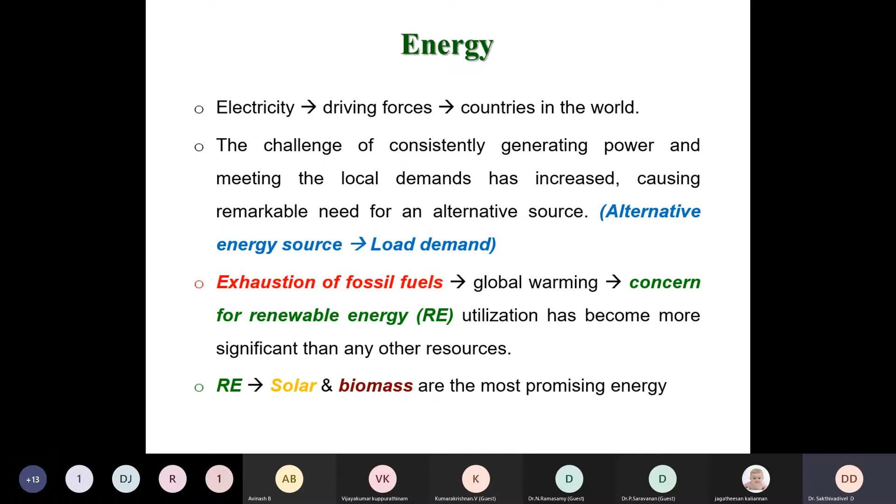So firstly, as I mentioned, sustainability is one thing we need to focus on in recent times and for future generations. The law of conservation of energy states that we cannot produce energy or destroy energy; we can only convert one form of energy into another. That is applicable for all renewable and non-renewable energy resources.

As I've already mentioned, we have taken biomass as one source of energy for converting it directly into a combustible form of producer gas, or syngas, through a technology called gasifiers. Before that, we want to discuss the other energy resources, and based on that, we have taken biomass as a source of energy for this gasification technology, so that energy conversion can be made in two different ways.

One is direct energy conversion systems, and the other is indirect energy conversion systems. In direct energy conversion systems, if there is no existence or involvement of any rotating component, we call it a direct energy conversion technology. When it comes to the indirect part, where a rotating component is involved, such as rotors and windmills,

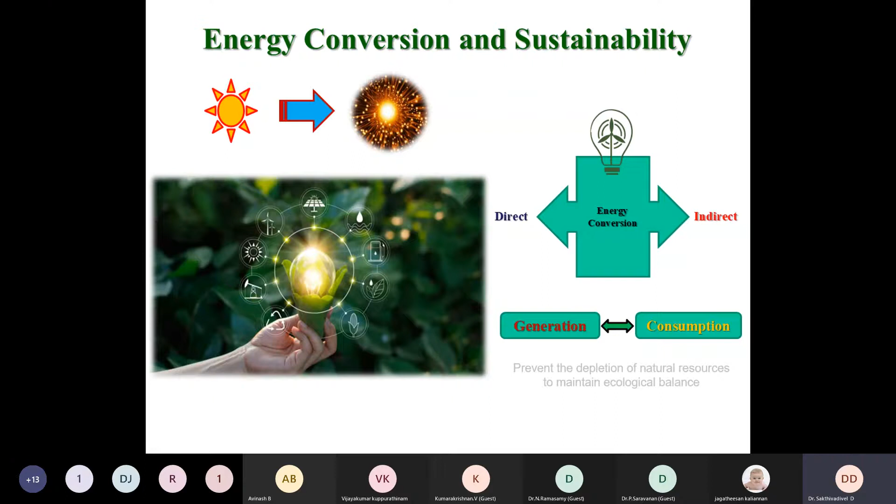Sustainability is also equally important whenever we are finding alternative sources of energy, and we need to take care of existing resources in terms of non-renewable energy resources. The renewable energy resources also need to be taken care of, where we need to transfer these energy resources to future generations. In that aspect, whenever generation equals consumption, we call it a sustainable solution, or sustainability, which is to prevent the depletion of natural resources and also to maintain ecological balance. That's why we are obviously focusing on sustainability.

When it comes to renewable energy resources, or the scenario of our country, as we promised in the Paris Accord on climate change in 2015, we guaranteed that around 40% of energy contributions will be made from renewable energy resources by 2030. One more important thing I will tell you at the end of the session. 2030 is going to be a remarkable year for our country, when all the promises are accomplished. By the end of November 2020, the overall contributions from non-conventional or renewable energy resources were around 38% for our country, and around 21% of total electricity consumption came from renewable energy resources.

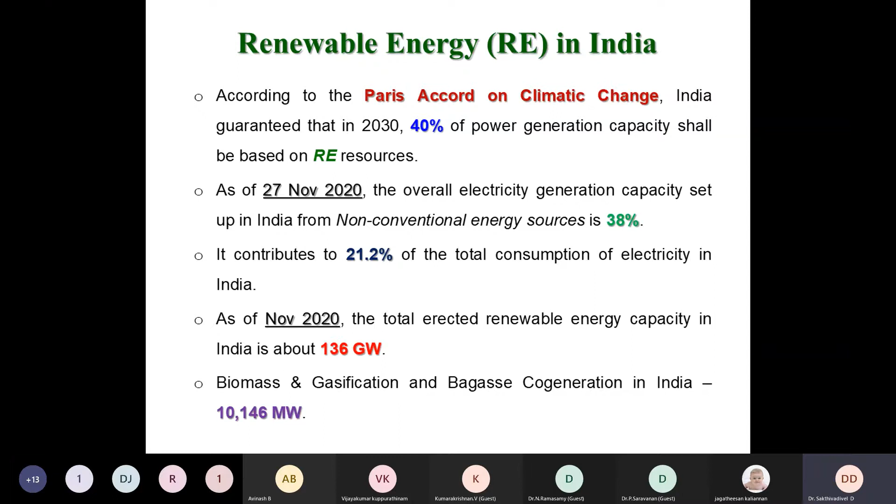The installed capacity of a country from renewable energy resources is around 136 gigawatts out of our overall installed capacity. Whereas biomass and gasification-based combustion systems are little low when compared to the solar and wind energy contributions to our country's overall installed capacity. So with this note, we will straight away go to the introduction part.

As we know, these biohydrocarbons, or simply biological matter or biomasses, are nothing but biodegradable materials over time or with respect to temperature. These materials can be derived from plants as well as from waste and from animals. So the chemical composition of this, we used to say, is a hydrocarbon also associated with some oxygen. Simply put, glucose C6H12O6 - here we have mentioned the chemical formula of a generic biomass fuel in this presentation.

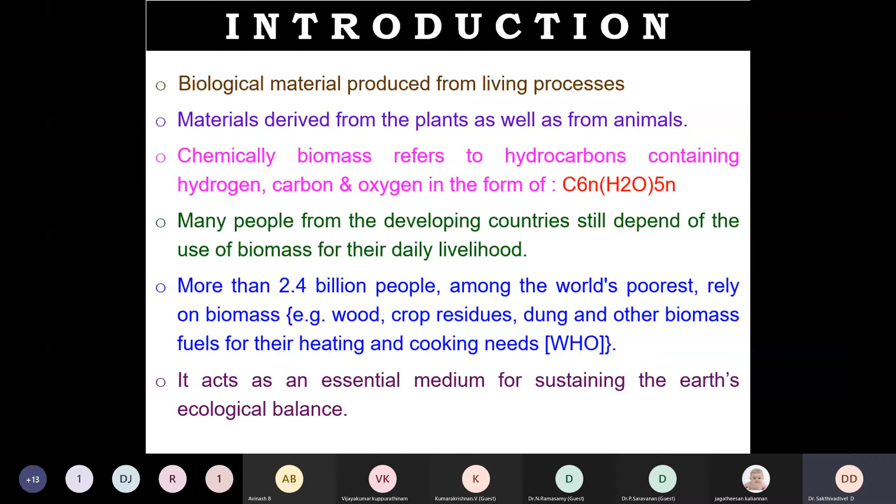Across the globe, many people, particularly from developing countries, rely on this biomass for heating and cooking - heating their households in cold climatic conditions, and particularly African countries relying on biomass for cooking applications too. So around 2.4 billion people across the globe are using this biomass for meeting their basic cooking demand. So these are some of the biomasses.

The classifications of the biomasses are given here: woody biomasses, crop residues, and animal waste.

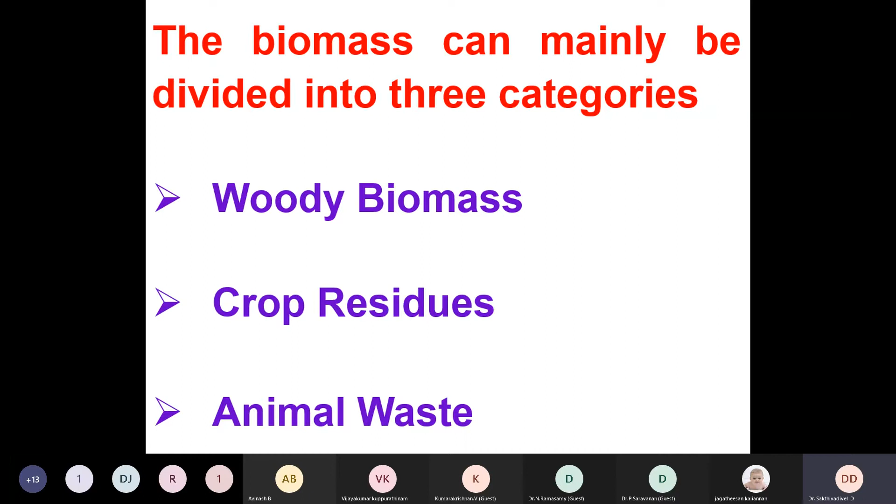Every day, on a day-to-day basis, we use these biomasses for many applications, which could be derived from the forest, or from furniture shops as waste, or from agricultural lands after post-harvesting or the cultivation process. We used to get a lot of waste that is being burnt in the field itself, which was creating a lot of pollution in the capital of our country.

That was being highlighted before this pandemic situation, a couple years back. So we need to address all these issues by identifying better solutions, by providing better technological solutions to convert this. Without burning it in the field, we can convert this into a useful form of energy - either electricity or thermal energy. For many applications we could consider using these technological solutions, by considering waste biomasses taken from the agricultural fields.

You can also find woody biomasses from forest trees, and this can be used particularly for cooking applications. In some rural areas, particularly in Tamil Nadu, we have Prosopis juliflora, which is nothing but Seemai Karuvelam maram in Tamil. That is an invasive tree that is to be eradicated from the motherland. So the government, and even our judges, have made some stringent comments on this to the collectors of a particular district.

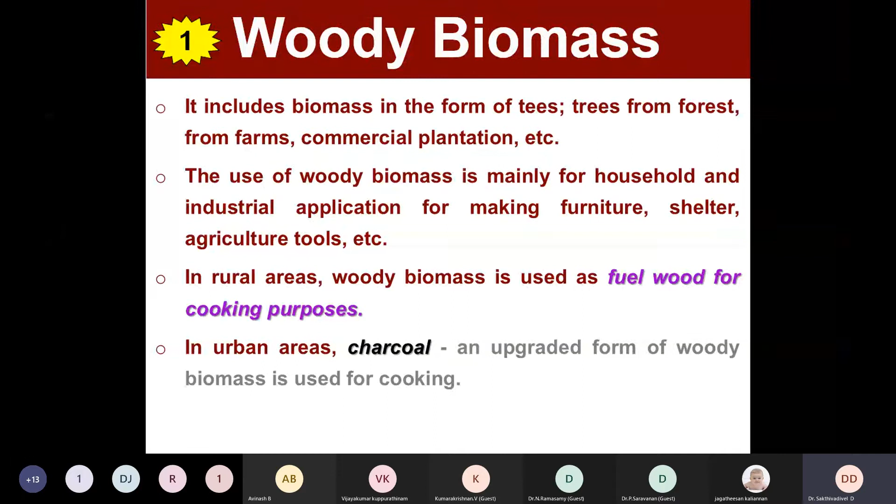This Prosopis juliflora was considered one of the main sources of income for people residing in that particular district, Ramnad district, and nearby. They used to convert this biomass directly into charcoal through charcoal-making kilns. Whereas if they sell these solid biomasses in the market at 0.5 or 1 rupee per kilogram, when they convert this into charcoal, they can sell it in the market at 12 rupees. So that is actually a good thing, as well as eradicating this invasive tree from the land. So that is one thing.

Animal wastes are also used - cow dung, poultry dung, and many animal wastes could be processed and used for cooking or for many applications. I would say one thing: this is the birth of the technology, meaning the gasifier, or converting solid biomass fuel into a combustible form of gas, is what is being done in our gasifier systems. It is the birth of the technology.

But this could even be used for the death of a human being, which I will explain at the end of the session. These cow dung cakes can be processed and used for cooking as well as for burning dead bodies. This can be avoided because the pollutant emissions will be directly injected into the atmosphere, which will directly contribute to global warming.

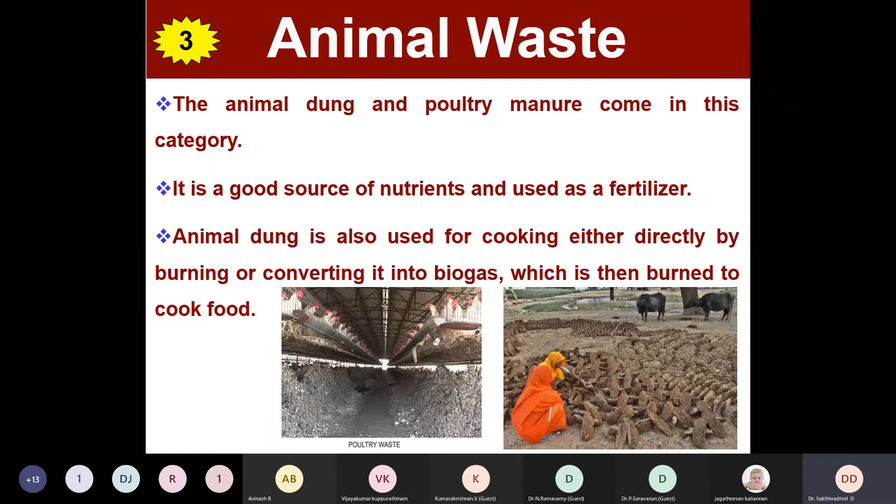This can be avoided by adopting a technology called gasifiers.

The energy content of biomass is depicted through the lower heating value and higher heating value. Energy content is a measure of how much energy, in joules, is released when you burn a kilogram of fuel.

In addition to carbon, hydrogen, and oxygen, moisture content and ash content are also associated with these fuels. These moisture and ash contents can create adverse effects if the biomass has higher amounts of them, so this should be closely considered.

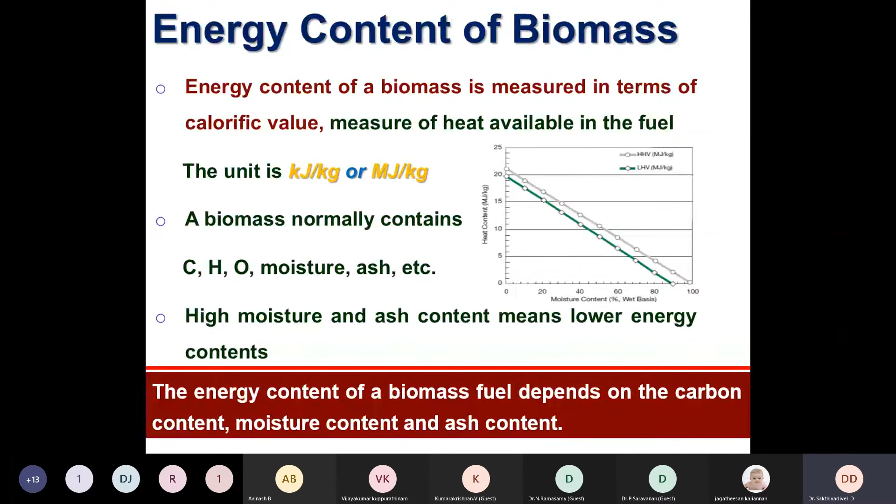We need to consider this moisture content whenever we are choosing the type of biomass gasifier to be used for any specific application.

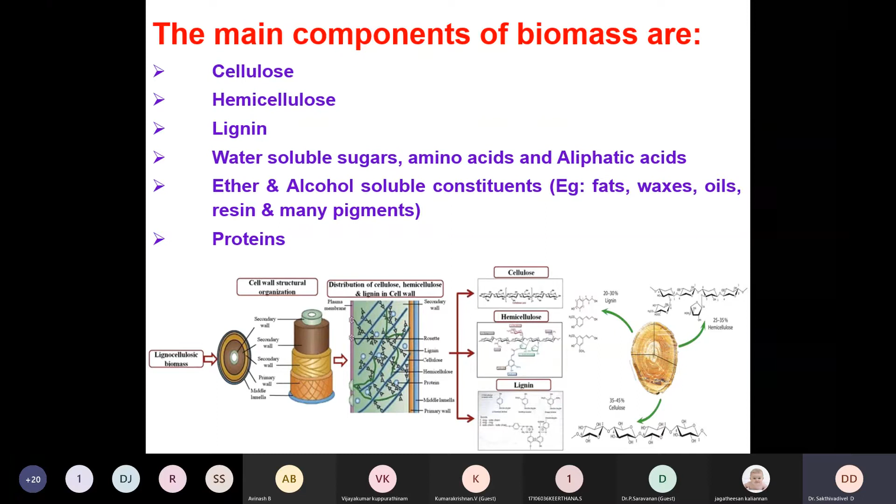These are some of the main components: cellulosic content, hemicellulosic content, and lignin content, which are the main sources of the calorific value of the fuel. Other water-soluble sugars, ethers, alcohol-soluble contents, and protein are also associated with it.

Almost every part of the country has an abundant amount of biomass, so the biomass potential is very, very high in our country.

Since biomass is a renewable form of fuel and accessible in nature, we can consider it for technological solutions to provide energy for meeting the basic demand of rural areas and also urban areas.

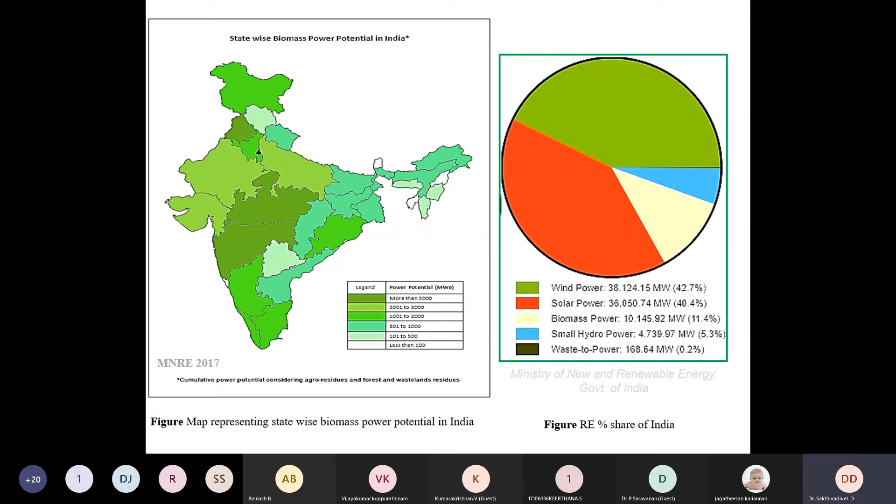This is the percentage share of renewable energy resources of our country, given in the right-hand side picture.

Now we'll move on to the carbon cycle. I wanted to make a point on the sun — it is a source for all renewable and non-renewable energy resources, and for living and non-living organisms present in this world, through the photosynthesis process, which drives the growth of trees.

In photosynthesis, carbon dioxide is taken from the atmosphere and H2O from the depth of the earth, and these are processed. The carbon and hydrocarbon produced will be stored in the stem of the trees — this is the growth of the plants.

This hydrocarbon stored in the stem of the tree will be utilized — not just the stem, but also the stalks and leaves, anything. Wherever we can find hydrocarbons, we can make use of it in gasifier technology.

This process is called gasification, where we produce producer gas composed of carbon monoxide, hydrogen, a very little amount of methane, carbon dioxide, and other things. In syngas, the purest form, almost only carbon monoxide and hydrogen with limited methane content will be present, and this can be used for many applications.

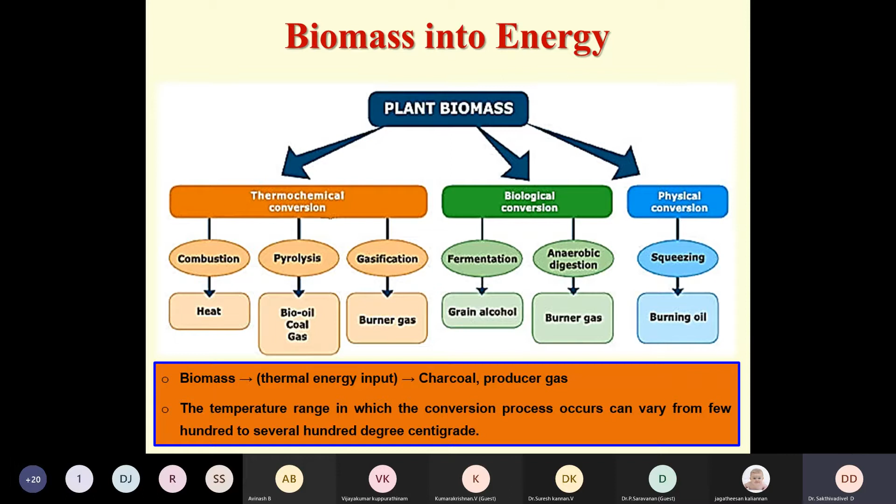In the gasification process, the solid hydrocarbon fuel is converted into a combustible form of producer gas with composition of carbon monoxide and hydrogen. This is the beauty of this gasification technology.

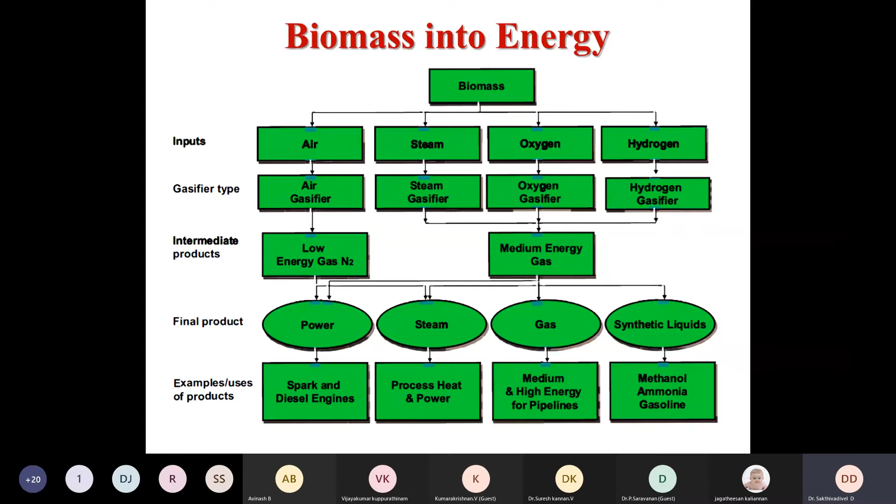Some of the gasifying agents used are air, steam, oxygen, and hydrogen, and we can use these for different applications. If you are particular about power, steam, gas, or synthetic liquids, you can concentrate on different types of gasifying agents so that the expected outcome can be achieved.

I will explain the next layer with the equivalence ratio in the next slide. Here the producer gas or syngas comes out, and once it continues to burn by interacting with sufficient atmospheric air, it is called combustion. There are a lot of differences between these three, but all of them take place together in any combustion reaction.

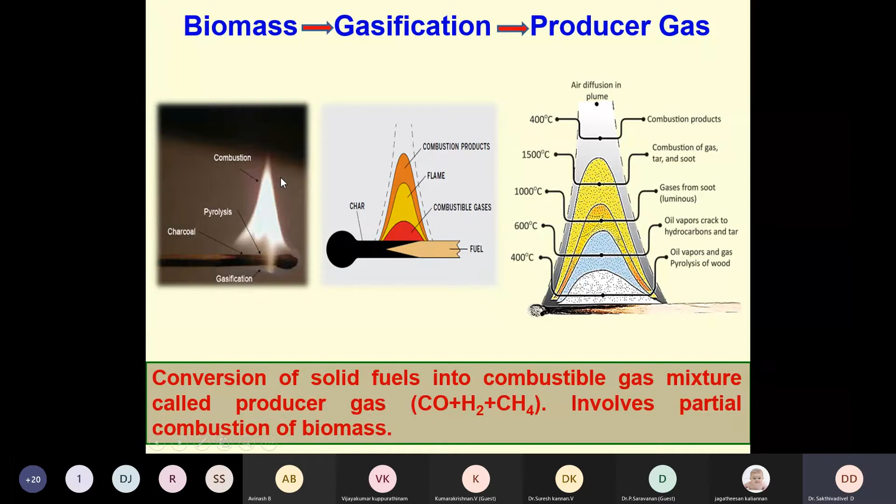The different layers and their temperatures are given in the right-hand side picture. This is very important for any type of combustion, gasification, pyrolysis, or carbonization process, because the combustion process is conducted at the equivalence ratio—the ratio of the actual air-fuel ratio to the stoichiometric air-fuel ratio.

When the equivalence ratio is around 1 or more, stoichiometric or excess amount of air will be supplied for the combustion process, so that complete combustion of this hydrocarbon takes place, and the remaining part becomes H2O or carbon dioxide.

But in the gasification or pyrolysis process, it is conducted at substoichiometric conditions, where the equivalence ratio would be nearly around 0.2 to 0.3. So the gasifying agent can be oxygen in its purest form, or we can use atmospheric air, and based on that we need separate calculations. Also, pyrolysis uses a very limited amount of air or no air supply at all.

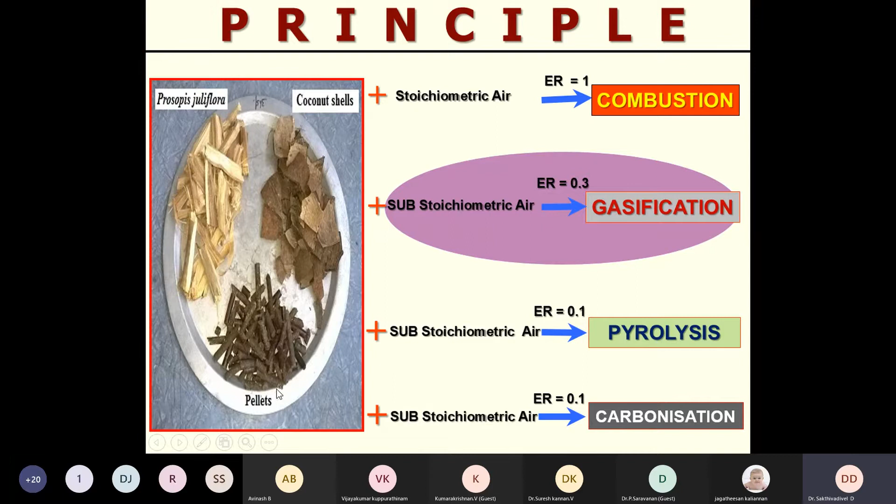Parallelly, pyrolysis and carbonization are almost the same, only the temperature difference makes sense in differentiating these two. As I already told you, excess air is supplied so that actual combustion can be attained.

Based on chemical calculations and reactions, we can predict the amount of air needed for combustion or any process — this is called ideal combustion, the stoichiometric air, where the exact amount is supplied. But you cannot achieve actual combustion this way, because excess air needs to be supplied for actual combustion.

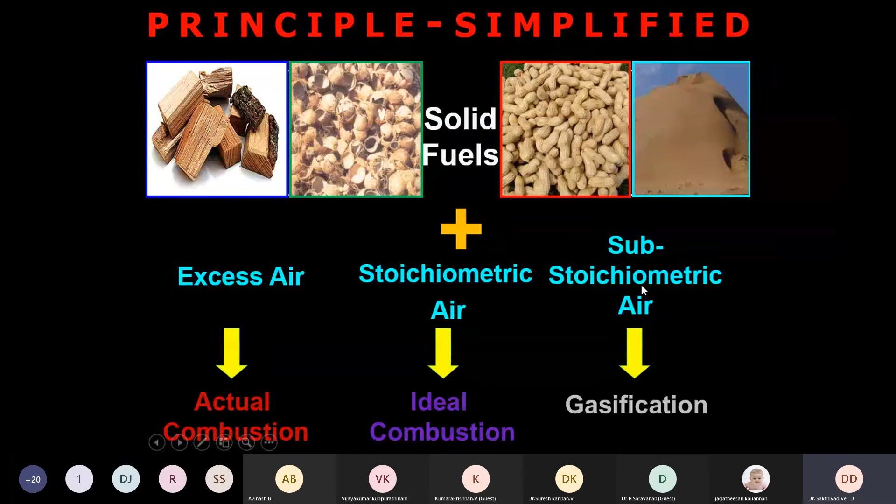Here, in the sub-stoichiometric case, we are limiting the air supply so that direct conversion of solid biomass to combustible producer gases can be achieved.

Look here, the C6H12O6 form of hydrocarbon reacts with oxygen and steam. If steam is used, you can expect much more hydrogen in the outcome. Steam gasification technology is also practiced for many applications.

Here, before the left-hand dotted line is the gasification zone. Once air is additionally supplied in the combustion zone, oxygen would also be found in the flue gases, along with H2O and carbon dioxide as the resultant products.

But in the gasification area, you get carbon monoxide and hydrogen, which are combustible. Still, you cannot combust carbon dioxide, as you know. So these combustible gases can be achieved based on the amount of air supplied.

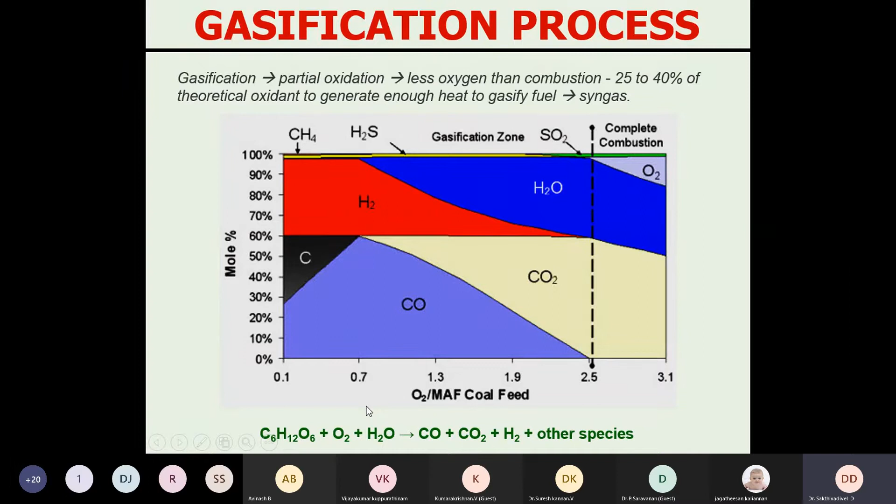So in the gasification process, these are the actual step-by-step procedures involved, from adding the solid fuel to generating electricity. This is not only for electricity generation, as I mentioned at the beginning of the presentation — it can be used for many applications, which I will explain at the end.

Once the producer gas is supplied to the engines, it can be coupled with a generator, so electricity is produced. That's what is shown at the bottom.

But the solid biomass, once taken into the gasifier, first undergoes drying, so the water content is removed. The second process is devolatilization, and combustion also takes place parallelly.

Here air will be supplied, and these are the carbon-based reactions expected in the gasifier. Carbon may react with oxygen to produce carbon monoxide. If it is complete combustion, then carbon dioxide will be the resultant product.

Once the red hot char is passed through, the carbon dioxide at high temperature reacts with carbon and produces carbon monoxide, which is further combustible in nature — this is the composition we expect in the gasification process.

The carbon also reacts once moisture contents are evolved, resulting in the production of carbon monoxide and hydrogen — this is exactly what we want. But all the other components will also be produced through this gasification reaction.

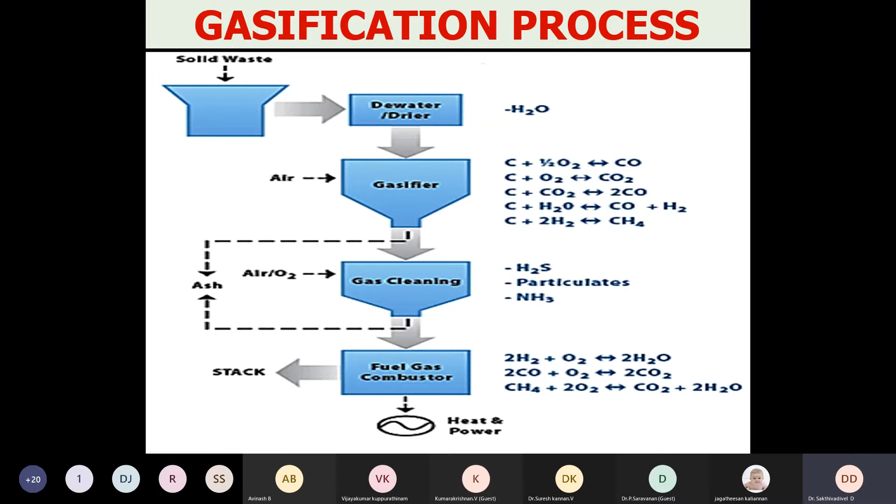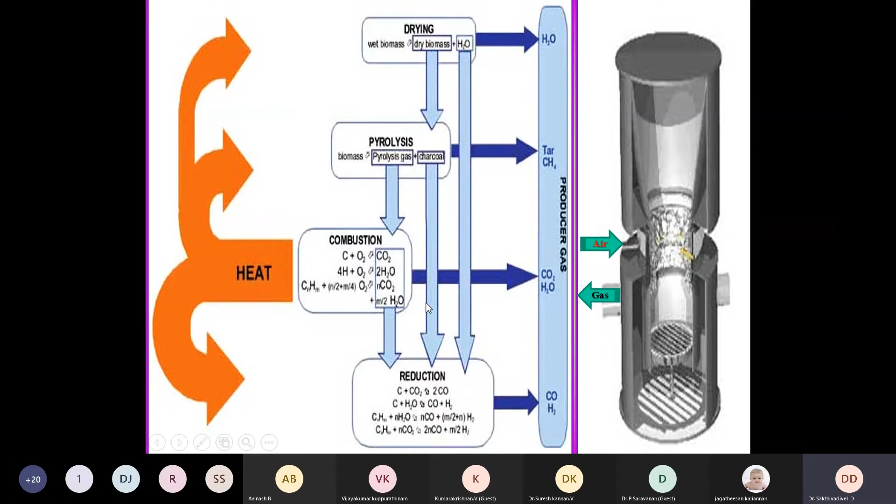Based on that, the selection of the gasifiers can be made. As I said, there are 4 reactions: drying, pyrolysis, combustion, and reduction, all occurring in parallel in gasification systems to produce the producer gas. The other reactions have already been discussed, so I'll be skipping this.

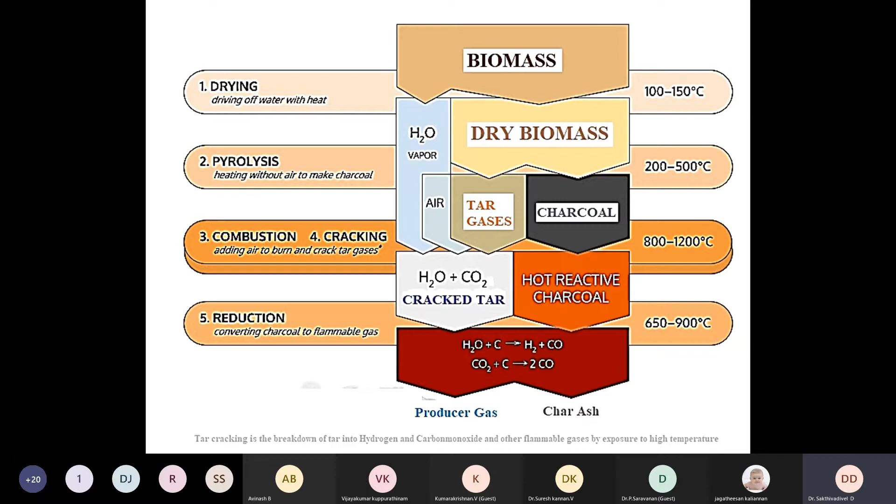The drying process is where the water content will be driven off, as we know. The pyrolysis is heating without supply of oxygen, or with very limited supply of oxygen, at lower temperature. The combustion or cracking of the tar content is performed in parallel, because at high temperature the tar content will be cracked, and aromatic and other forms of combustibles evolve from this cracking of the tar. Finally, the reduction, where carbon dioxide from the combustion process passes through the red hot char, so the carbon reacts with carbon dioxide to produce carbon monoxide. Again, this will be part of the producer gas.

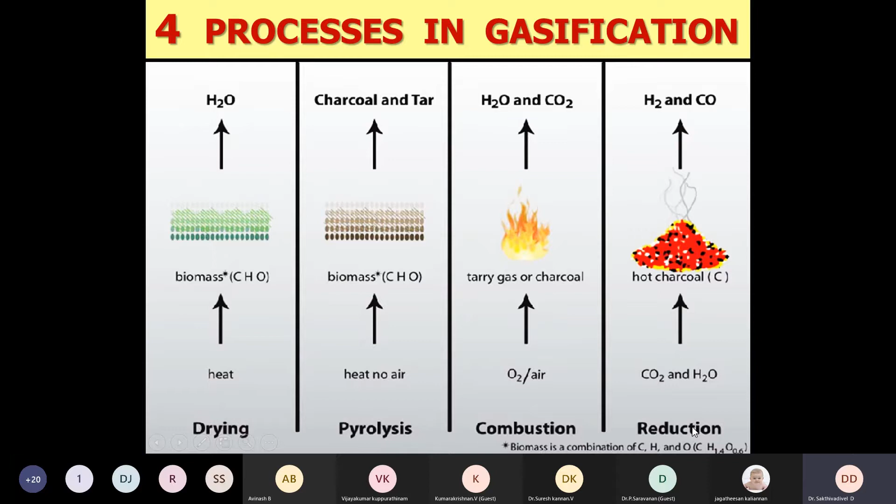Here I have given a table comparing the gasification and combustion processes. In the gasification process, carbon is expected to convert into carbon monoxide, whereas in the combustion process it converts into carbon dioxide. For hydrogen, it should remain hydrogen in gasification, but in combustion the resultant product is H2O. Nitrogen remains as is in gasification, but in combustion NOx is formed, since excess air is applied at high temperature. The sulfur content converts into hydrogen sulfide, and we have some techniques for eliminating this hydrogen sulfide, which I'll explain in the next slide. In gasification we expect syngas or producer gas, but in combustion the exhaust gas or flue gas is the resultant product.

So these are the combustion reactions: carbon produces carbon dioxide, hydrogen produces H2O. This is the actual reaction taking place in the combustion process.

But in gasification reactions, we have heterogeneous and homogeneous gas phase reactions. In the water gas reaction, H2O reacts with carbon to produce carbon monoxide and hydrogen. The carbon monoxide producing reactions are endothermic, whereas the carbon dioxide producing reaction is exothermic. These involve different phases: one is liquid, one is solid, producing gas. These include the Boudouard reaction and methanation reactions, which are heterogeneous reactions. But this converts into homogeneous gas phase reactions, where carbon monoxide reacts with H2O to produce carbon dioxide and hydrogen - all homogeneous reactions.

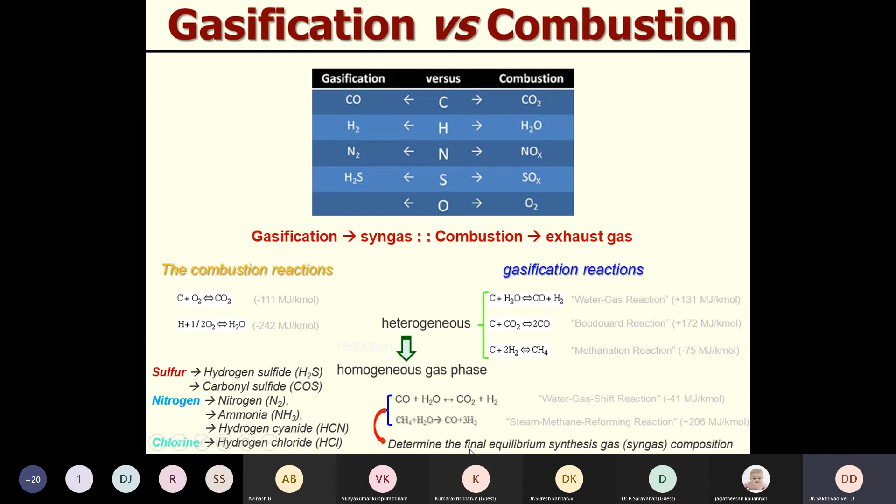Some gasifier technologies, different types of gasifiers, are shown in this picture: updraft gasifier, downdraft and crossdraft gasifiers, and one more called the fluidized bed gasification system, which will be explained in the next slide. The efficiency of the updraft is much higher than the downdraft and crossdraft, as far as other forms of gasification technologies are concerned.

But in updraft systems, one problem is that it produces a large amount of tar content, and the gas is expected at 400 degrees Celsius. When it comes to downdraft gasifiers, the temperature of the outside gas is very high and the tar content is very limited, minimal, so gas engine based power generation systems would preferably use downdraft gasifiers. Recently, hydrogen production has also been of keen interest to researchers using downdraft gasifiers, not updraft gasifiers.

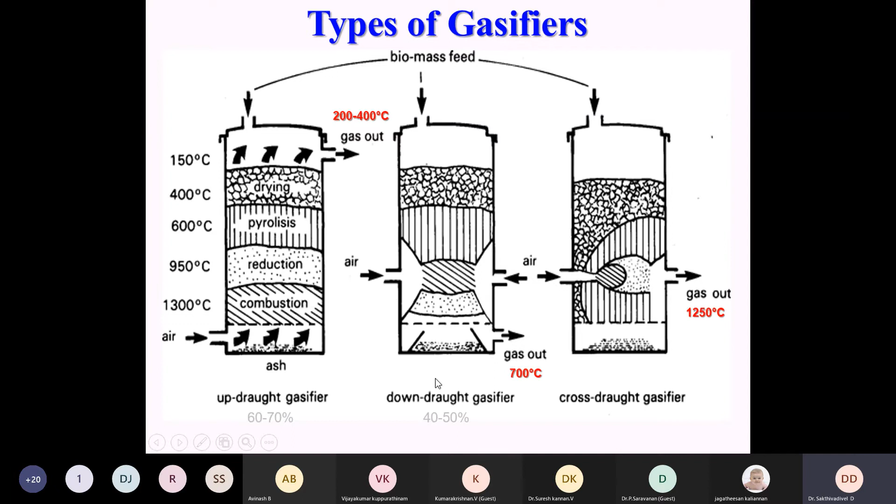This updraft gasifier can be widely used for cooking applications, where thermal applications are required directly. If heat is required, we can preferably take this updraft gasifier. But in crossdraft gasifiers, the initialization is very easy, and the size of the system is very small compared to the updraft, because the updraft is very, very high. So these are all the pros and cons of these gasifier systems.

In the co-current, counter current, or updraft gasifier systems, air is supplied from the bottom through a perforated plate called the grate, and on top we have the fuel feeders. Fuel is fed from the top and air is supplied from the bottom, so this is called counter current, and the gas is extracted from the top. As discussed, the thermal efficiency will be high and exhaust gas temperature will be very low compared to the downdraft and crossdraft gasifiers.

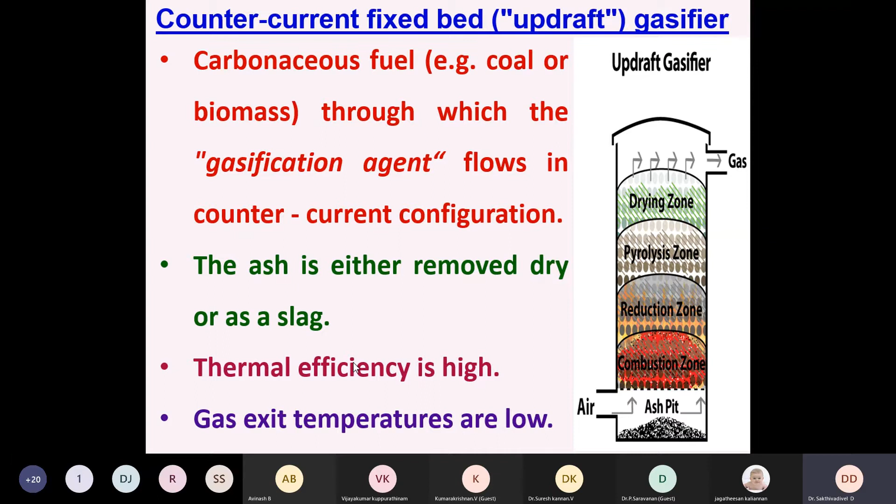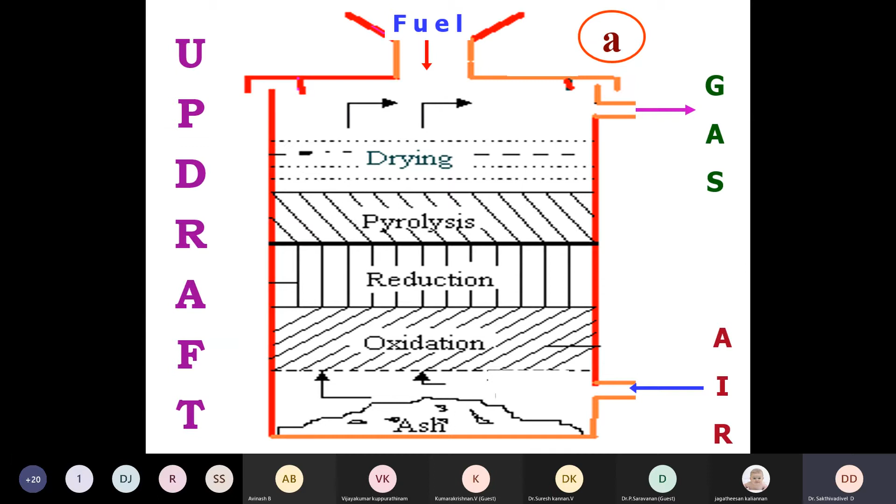These are the different stages: the drying zone, when the fuel is fed, the temperature drives off the water content in the biomass fuel or any fuel used in the gasifier. In pyrolysis, since there is no or minimum supply of air, we call it the pyrolysis reaction. When oxygen initially interacts with the biomass, it's called the oxidation process, where char is produced. The char reacts with carbon dioxide to produce carbon monoxide in the reduction part. Ash will be collected at the bottom, since this is a perforated plate, the ash content can be collected there.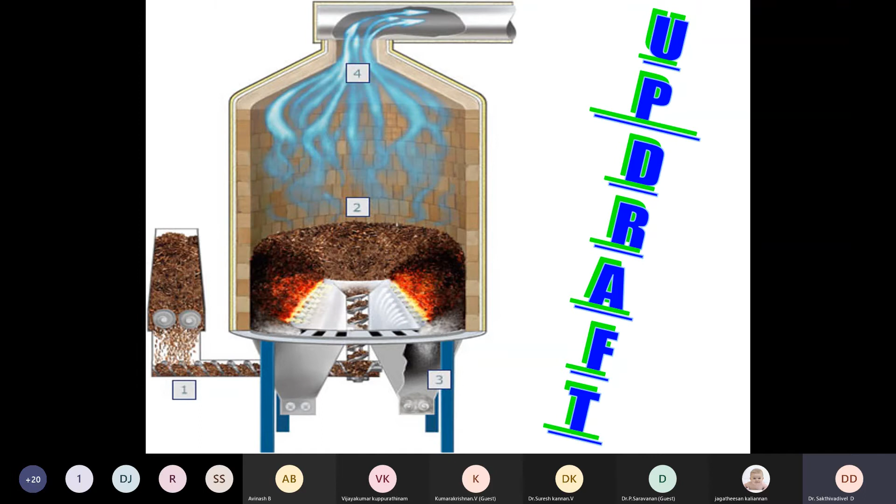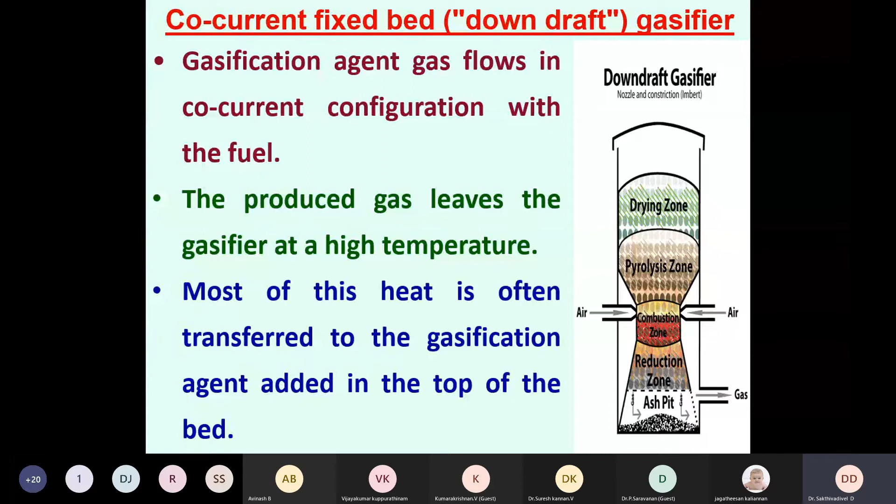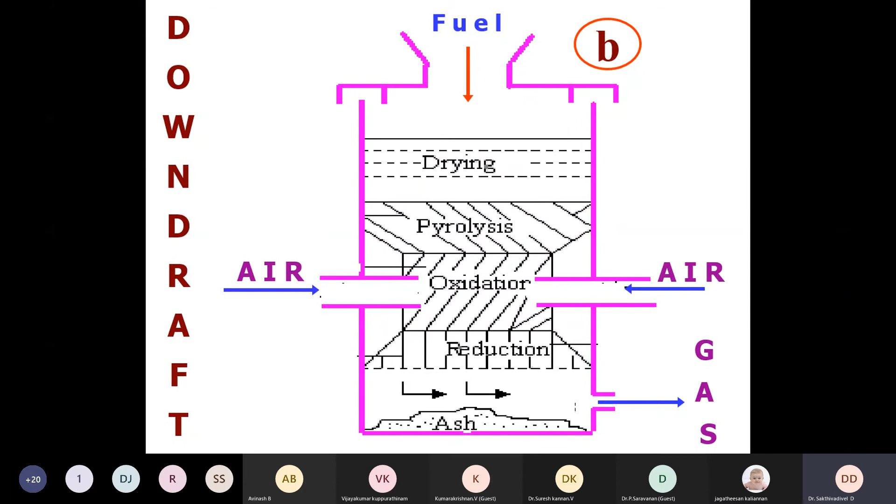Here in the co-current or downdraft gasifier, the pros and cons were already discussed. Here, air is injected at the top and the gas is collected at the bottom through the perforated plates. This sort of arrangement is called the downdraft gasifier. These different layers clearly show the differences between the updraft and downdraft gasifiers.

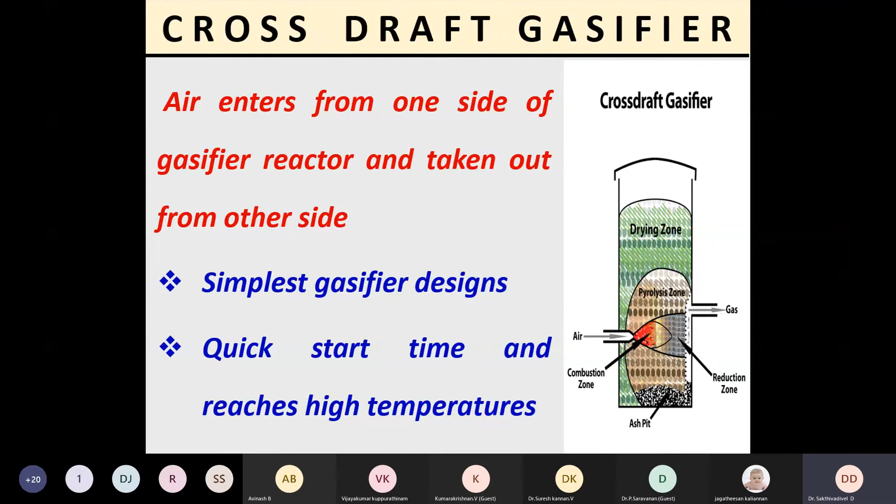Now we will go to the next process called crossdraft gasifiers. I told you that the simplest form of gasifier is the crossdraft gasifier, and whenever we expect a quick start of the biomass gasifier, we would preferably take this crossdraft gasifier. Whereas in fluidized bed gasifiers, a sand bed is maintained on the perforated plate called the grate.

Air will be supplied at higher velocities from the bottom, so pressurized air is used as a gasifying agent at very high superficial velocities, causing the sand bed to move, creating a kind of fluidization. This is due to the higher velocity, causing the sand to float in the air.

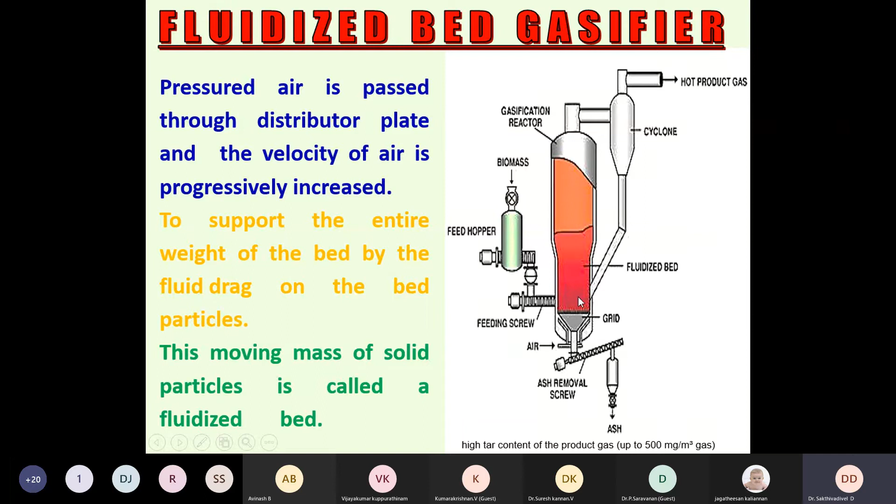The advantages of this system are that uneven sizes of fuel can be used, though higher tar content of the product gases is one drawback. It is a circulating fluidized bed gasification system, where sand particles and ash content are circulated back through the cyclone separators and fed again into the fluidized bed gasifier to maintain the thickness or bed size continuously.

So the temperature in the gasifier, an even temperature, will be maintained from the top to bottom of the fluidized bed gasifier. That is one of the advantages.

Also, smaller particles can be used in these gasifiers, whereas in the updraft and downdraft we could not use them because they would fall down through the perforated plate. But here the superficial velocity is employed so we can use them, and the operating temperature will be very low compared to the ash fusion temperature, so the clinkering effect can be drastically reduced.

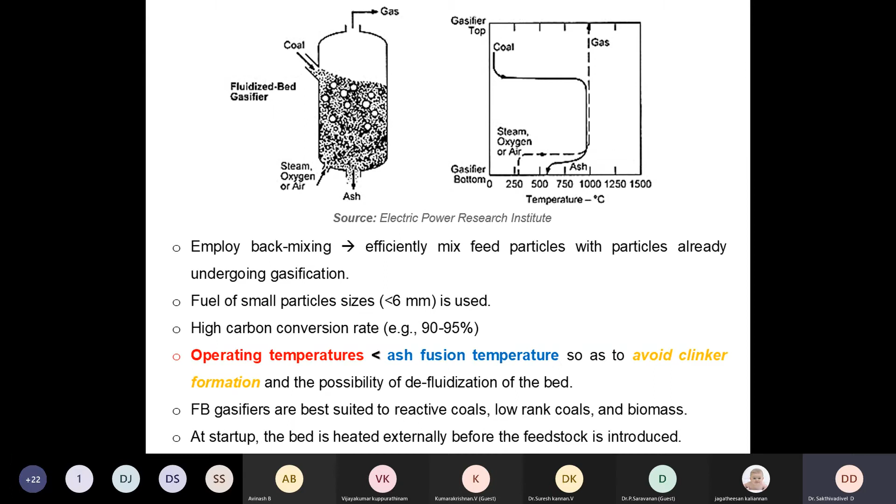So this fluidized bed gasification system can be preferably considered for this kind of application, and the startup will be very easy. Once the fluidized bed gasifier is used, the fuel will initially be heated up externally from outside, but all other systems—updraft, downdraft and crossdraft—are heated up within the system itself.

Loading flexibility is there, heat transfer rate will be very high, and the fuel flexibility, as I mentioned, you can use any type of fuel. You can use this as a moderate oxidant, and the steam requirements...

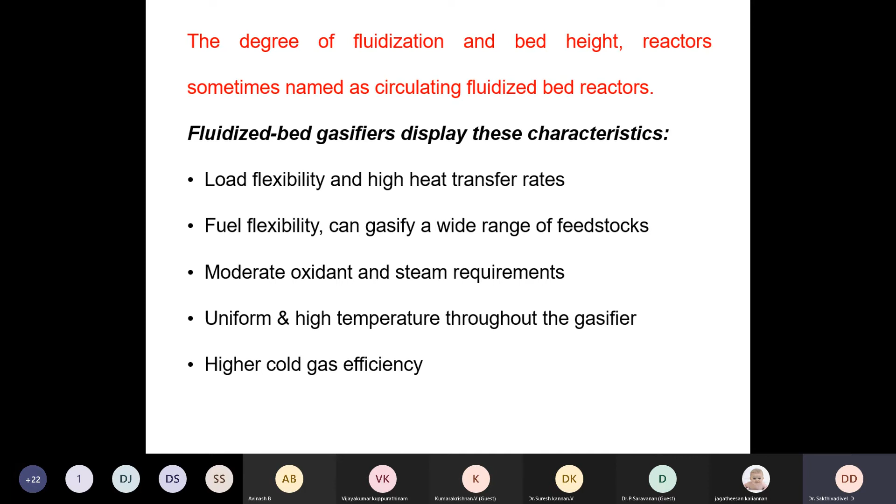Temperature will be maintained uniformly in the system. Cold gas efficiency of the system will be very high, meaning the biomass conversion into producer gases will be very high.

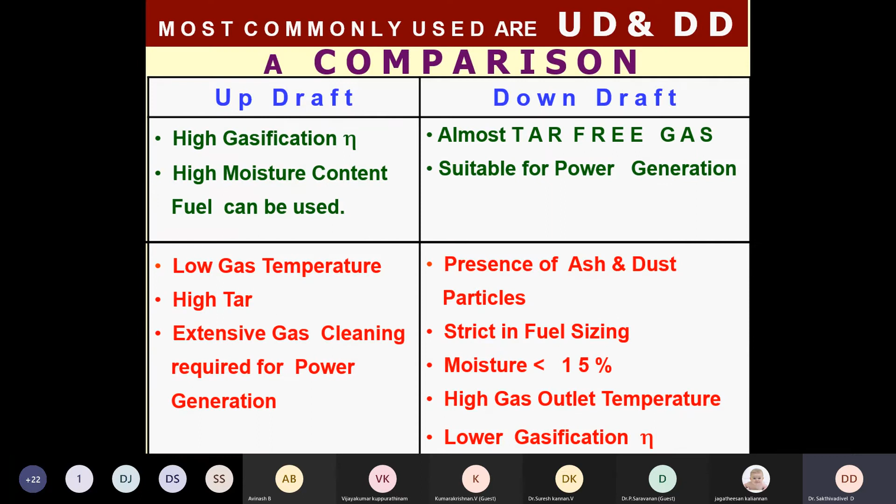Some of the advantages and disadvantages have already been discussed. Considering time constraints, I would skip all these comparisons since they were already discussed.

This is the typical composition of the syngas produced, the producer gas produced, where around 20 percentage of carbon monoxide and hydrogen respectively could be found.

The calorific value of the system would vary from 1000 to 1300, but recently we have achieved 1500 in one of our collaborator's gasifier, a downdraft gasifier.

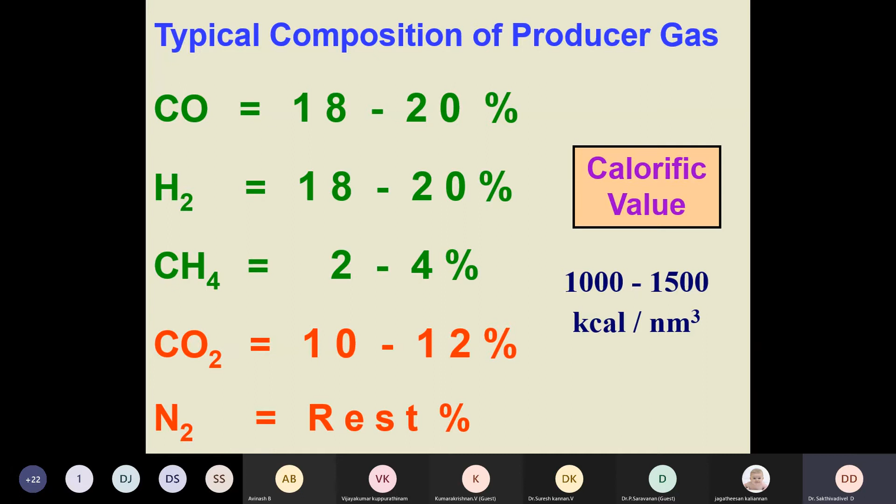The methane content would be in the range of 2 to 4, which is traceable, but that is not much in these producer gases.

Some of the purification methods for the gas are also given. Precipitation techniques can be adopted, along with hydrolysis process, adsorption, and sulfur recovery.

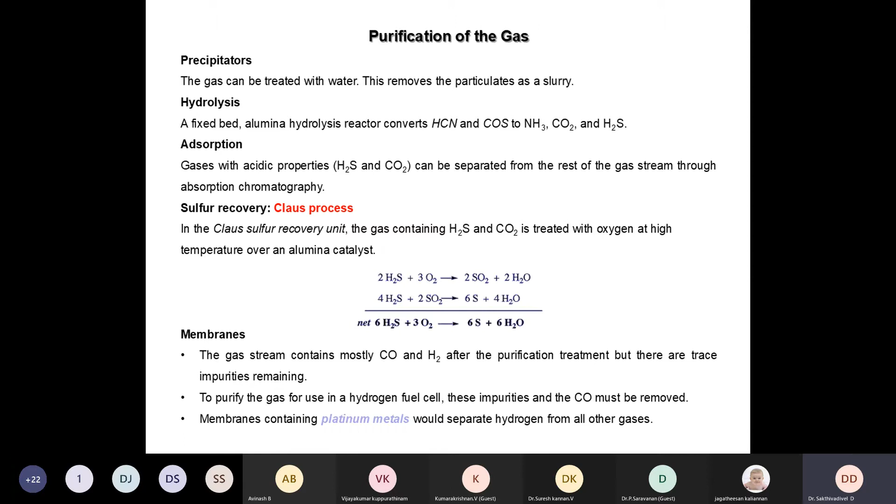Through the hydrogen sulfide, we supply oxygen to produce the sulfur content so that it can easily be removed. Membrane technique is also recently adopted for purifying these producer gases, so that we can convert this into syngas for supplying the system in direct applications.

The water gas equilibrium reaction is given here, and the equilibrium constant is also given for different temperatures. Theoretical temperatures are given, and it was also parallelly tabulated on the right hand side.

You can see that the higher the temperature, the higher the value of the equilibrium constant. If the temperature decreases, this KWE value, the equilibrium constant value, would tend to decrease with respect to the temperature.

Once it falls below 700 degrees Celsius, we call it a frozen state of the gasifier, because the water gas equilibrium constant would be very low.

And here the gasification efficiency, mechanical efficiency of the gasifier, and also the thermal efficiency of the gasification systems are given.

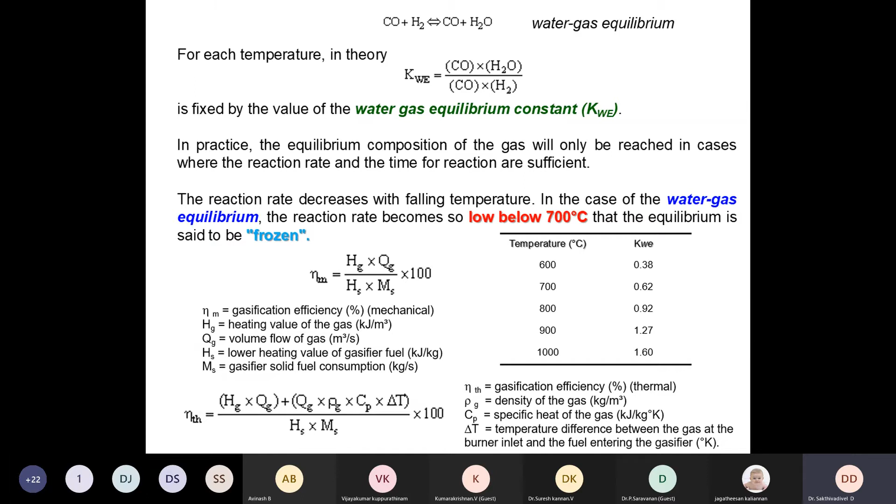You can preferably refer to this graph where the carbon dioxide and the hydrogen content would be increasing with respect to the moisture content. If the moisture content is very high, you can preferably go for updraft gasifiers, but downdraft gasifiers you can use only up to 15% of the moisture content.

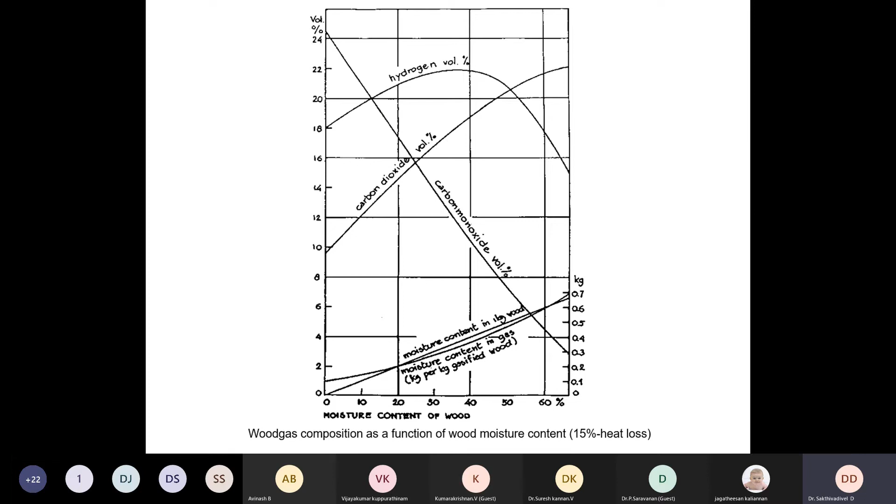That is one of the drawbacks of downdraft gasifier, where the carbon monoxide is also decreasing with respect to the moisture content of the wood.

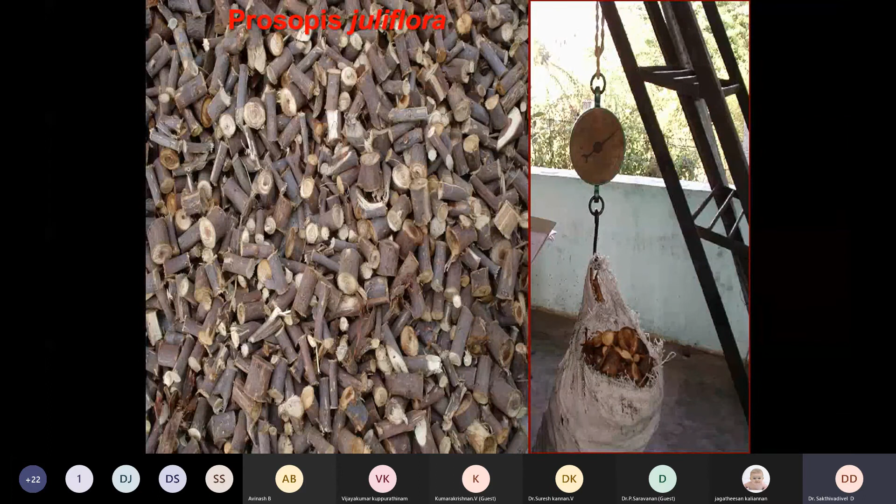Some of the woods or fuels that could be processed and used in the gasifiers are given in this table. Chaff cutter, where the Prosopis juliflora, as I mentioned, the Seemai Karuvelam in Tamil, so it can be found across the state, and it is an invasive species that should be completely eliminated from the land.

Some of the other wooden pieces, coconut shells, since we are the leading producers of coconut according to the United Nations.

We are producing 1 crore and 17 lakh tons of coconuts every year, particularly from Kerala and Karnataka, which are the largest producers in our country. Still, Tamil Nadu is producing 31% of the coconut in India.

Some of the other technologies of these biomasses - it is artificially created biomass, nothing but loosely bonded molecules of hydrocarbon fuels. For example...

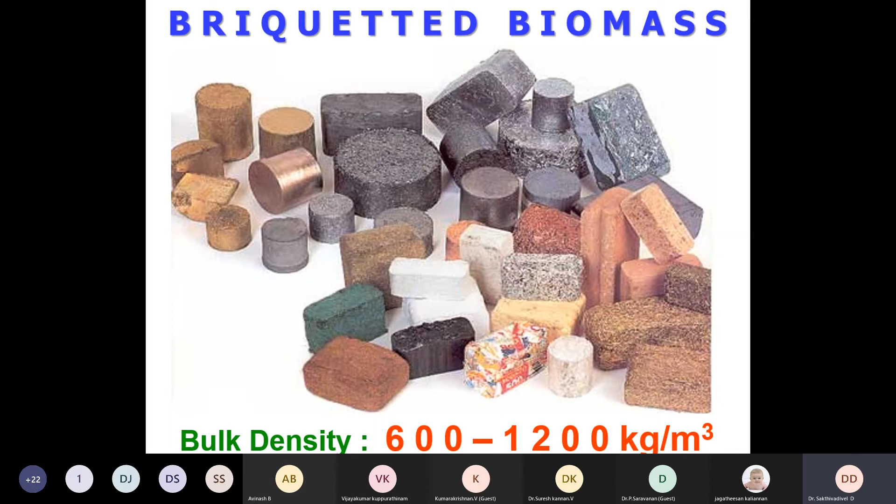Bagasse, rice husk, and sawdust could be collected and processed at high pressure, more than 20 megapascals or more. The bulk density can be increased so as to decrease the occupied volume of the sawdust, rice husk and other bagasse wastes, so the size will be reduced and the calorific value, heating value of the fuel, can be increased by increasing the density of the fuel.

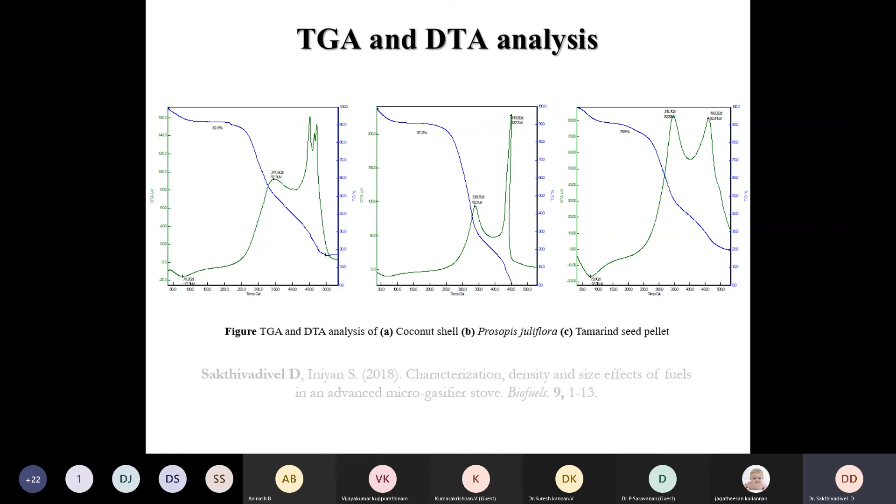These are the tests that were carried out, where you can see the moisture content eliminated, and the endothermic and exothermic reactions of the fuel. All these could be found from this published paper.

And the utilities, where the thermal and electrical applications of using these gasifier technologies, are going to be discussed one by one.

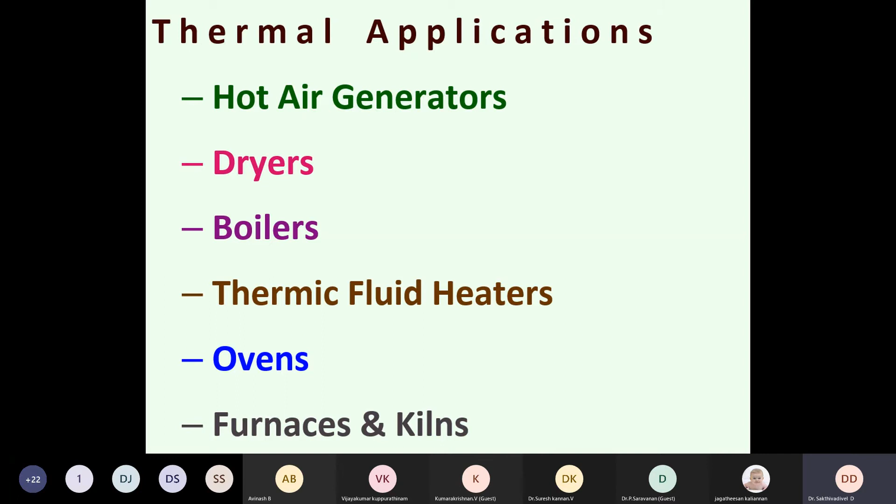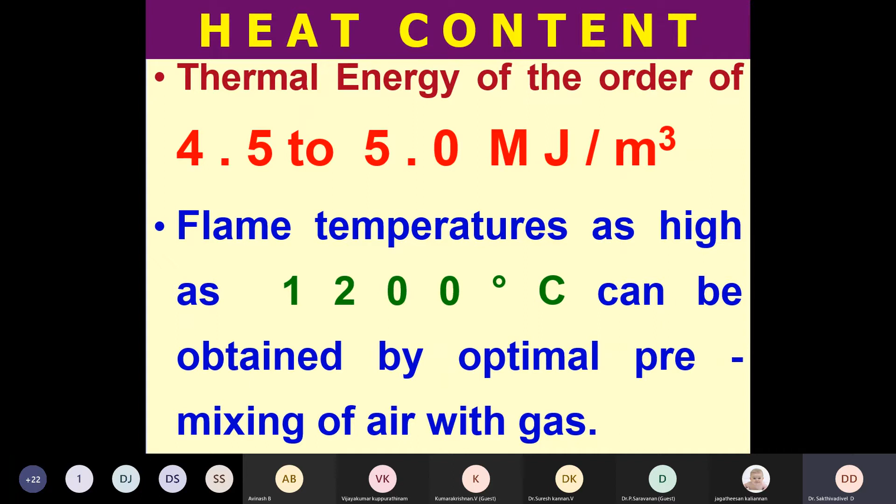Here are some applications of gasification based thermal systems, starting from hot air generators, dryers, boilers, thermic fluid heaters, furnaces and kilns, ovens, everything that can use this gasification technology. Heat content of that fuel is 5 megajoules per normal meter cube, and the flame temperature is also very high. Some applications include bleaching applications, which can replace conventional methods.

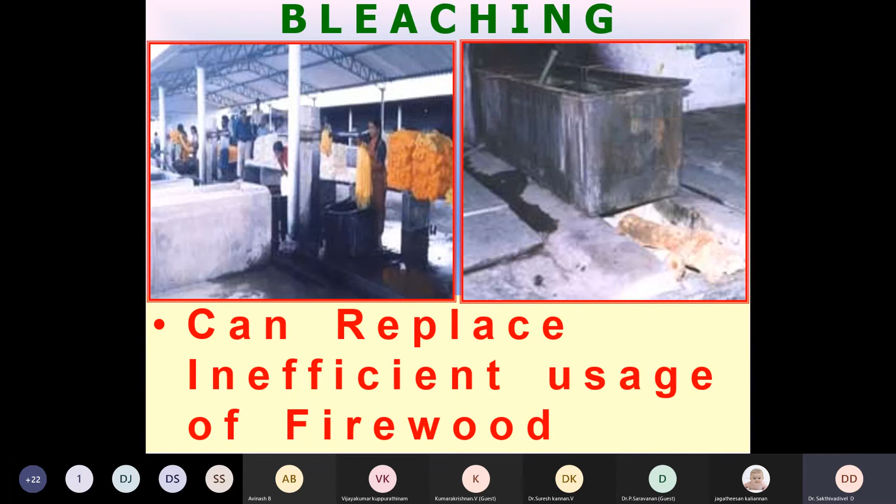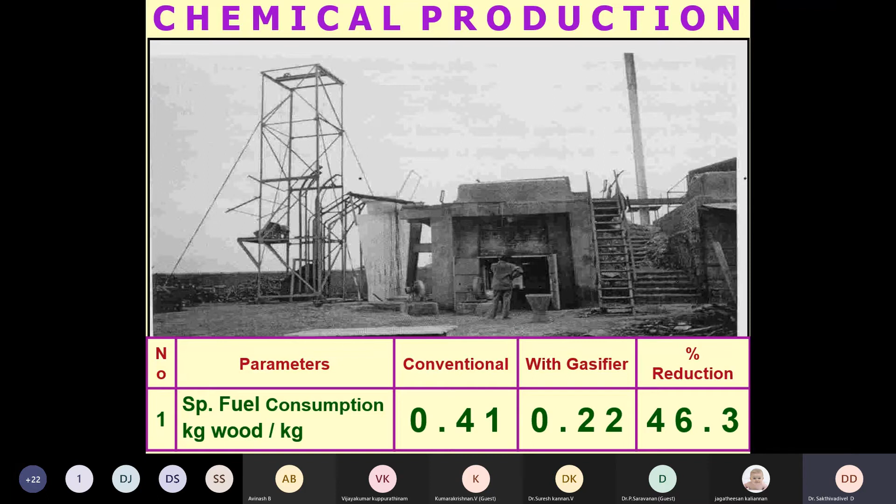Our ancestors followed conventional bleaching techniques, but now it can be replaced by gasifier based bleachers, and also chemical production units. These are some practical examples done by our professor from Anna University, Dr. Sethumadhavan.

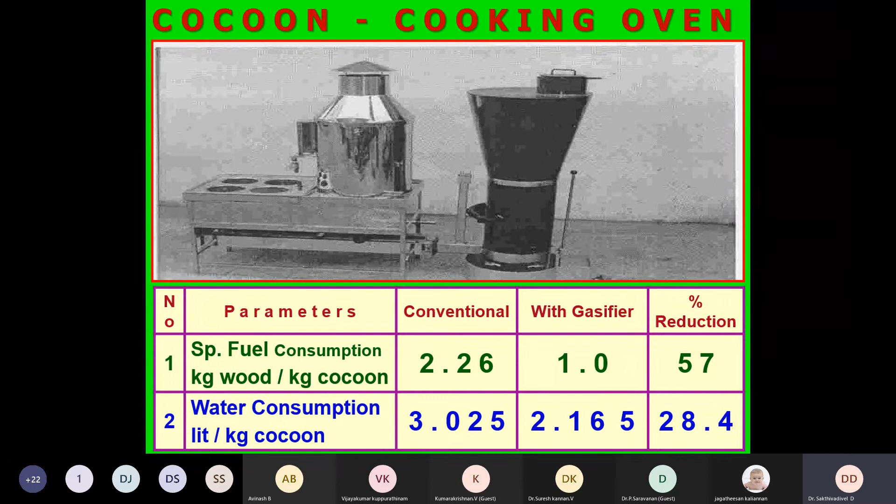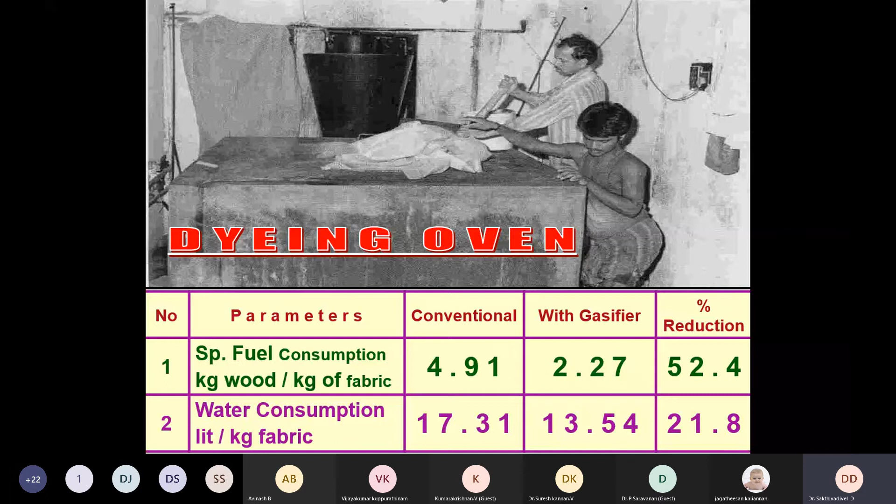The cocoon cooking oven, where silk can be produced using gasifier based technologies, reduces fuel consumption and water consumption for cocoon processing by around 50%. In dyeing industries too, they have curtailed their usage of biomass by 50%.

Another thing to consider is the progression from three stone firing to improved chullas. In recent times across the globe, many premier institutes like MIT's D Lab Design Laboratory, Lawrence Berkeley National Laboratory, Oak Ridge Laboratory, Colorado State University, The Energy and Resources Institute, Indian Institute of Science Bangalore, IITs, VIT, and online universities all over the world and country

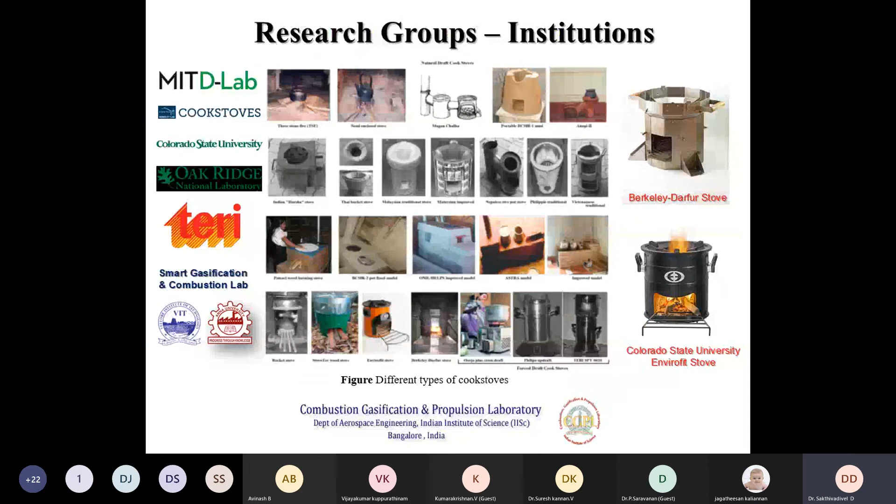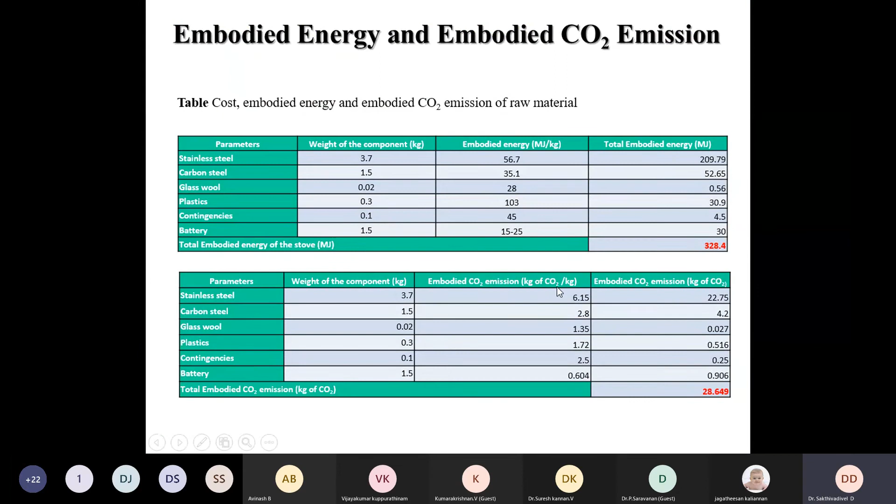I have also designed and fabricated a stove and tested it in our laboratory, which was published in many reputed journals, where the embodied energy and embodied carbon dioxide emissions were estimated for our stove.

The economical and emission reduction certification was also given, including the carbon payback period. The annual carbon dioxide mitigation potential is very important: when improved cook stoves are compared with traditional three stone cook stoves, they have curtailed around 212 metric tons of carbon dioxide every year.

But with the system we designed, fabricated and tested, it was proven that 428.6 kilograms, or metric tons, of carbon dioxide was mitigated when compared with traditional cook stoves.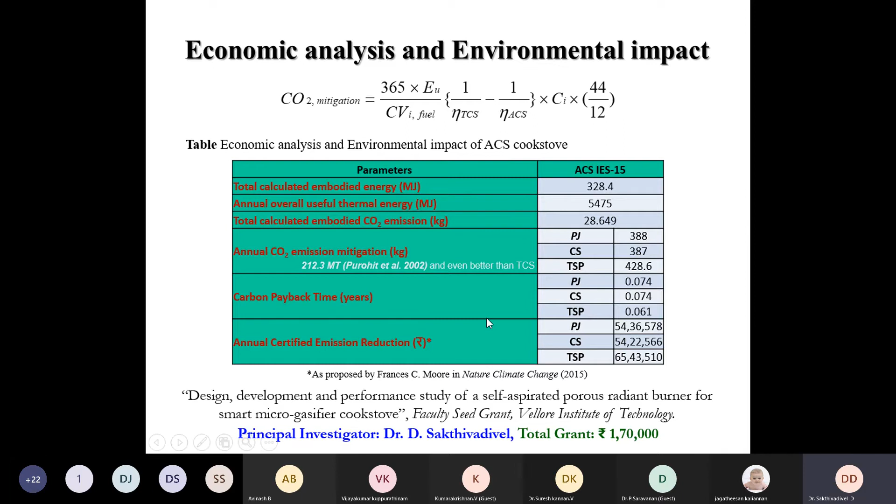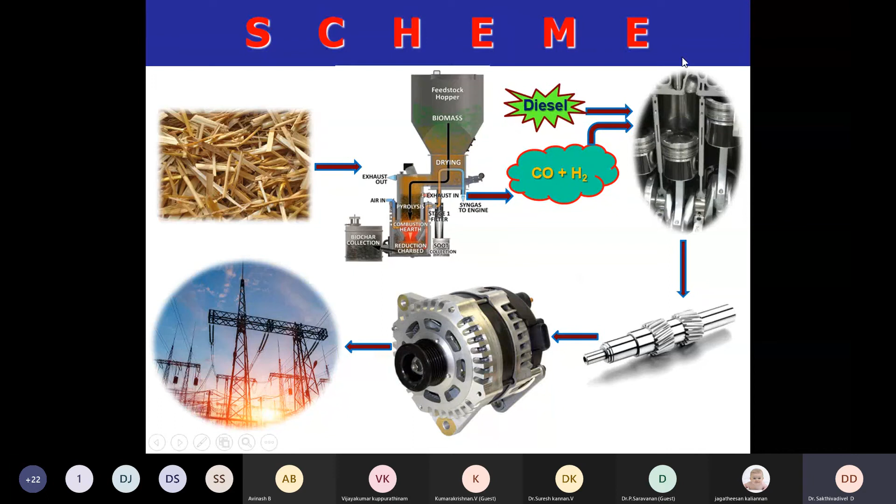Some electrical applications involve feeding biomass directly into gasifiers, which produces syngas that can be cleaned up and directly injected with diesel, at around 80%.

This is the gasifier installed at VIT, Vellore Institute of Technology, in the Carbon Dioxide and Green Energy Technology Center, with a capacity of 100 kilowatt electricity, where the syngas produced is injected at 80%, and diesel makes up the remaining 20%.

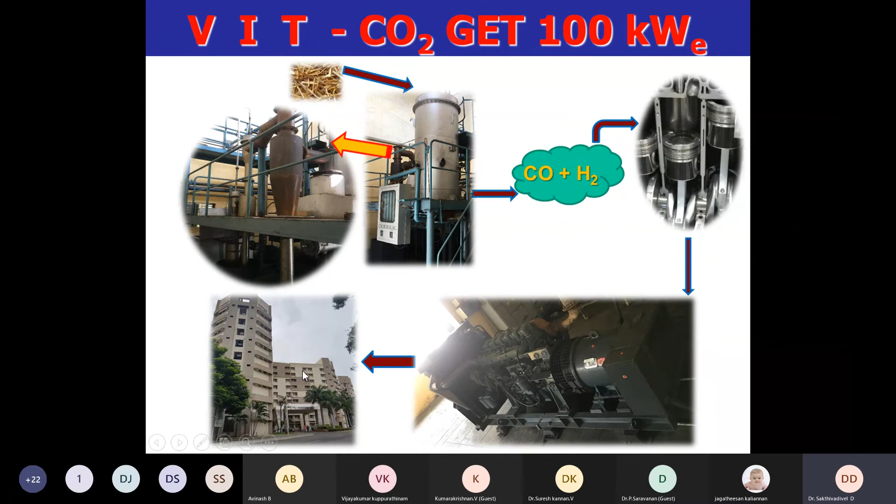This is a dual fuel diesel engine of capacity 130, manufactured by Kirloskar, which can meet the needs of 3 hostels on our campus, specifically boys hostels, driven by the gasifier based gas genset.

We have recently been sanctioned a project of 1 crore and 8 lakh rupees, and I am the principal investigator. This project uses a biomass gasifier based system for producing gas, proposed for 3 different applications.

One is for community cooking at school, and cold storage systems using a vapor absorption machine, an ammonia water vapor absorption machine, so that cold storage can be useful for farmers of the particular scheduled tribe community of Yelagiri Hills.

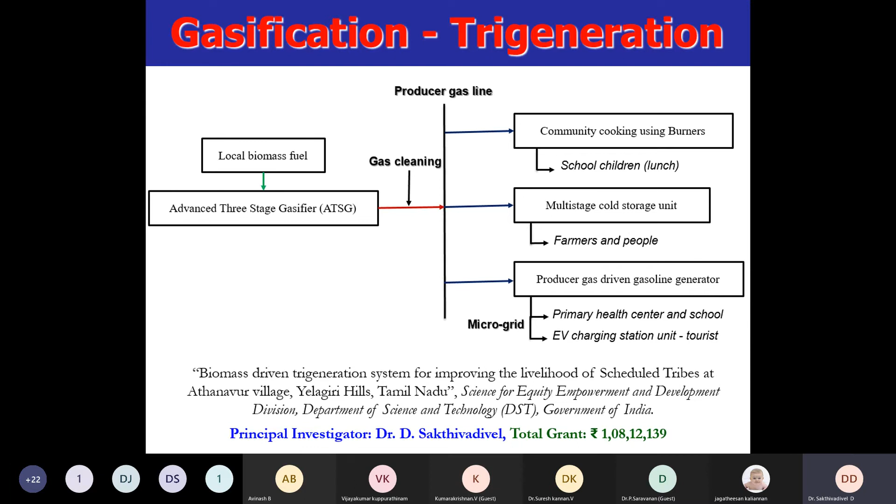And the producer gas driven gasoline engine for electricity generation, which has been projected for a primary health center and electric vehicle charging stations for tourism, to promote tourism.

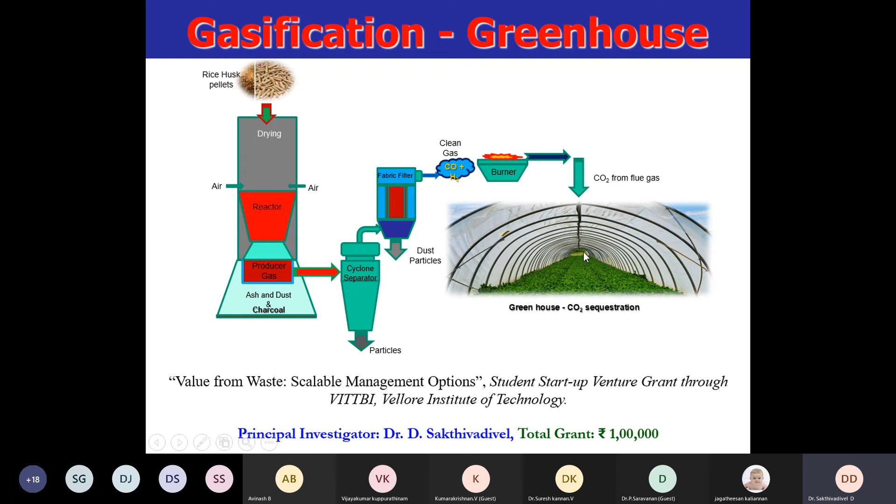We have also been sanctioned 1 lakh rupees from the VIT incubation center for a biomass gasification system based burner, which can parallelly be used for cooking, with the remaining flue supplied to greenhouses for carbon dioxide sequestration process.

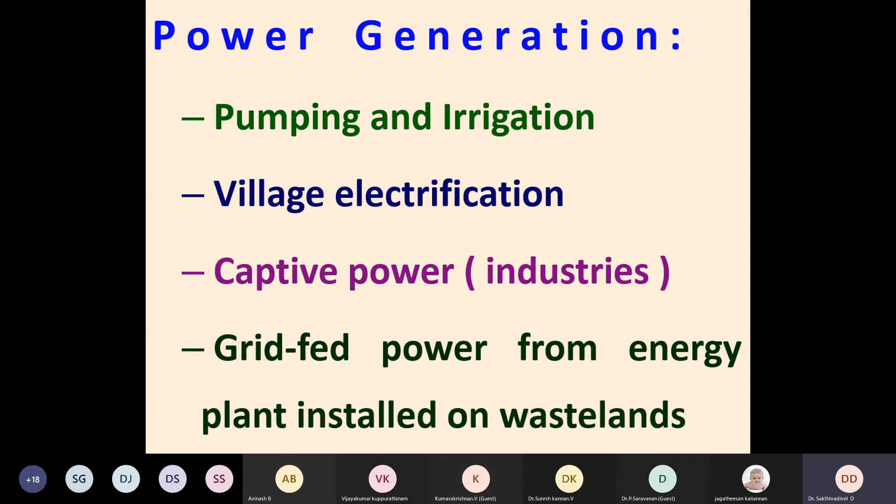Some of the other applications of power generation can be used for rural areas, for many applications such as pumping and irrigation, electrification of villages, captive power for industries, and also grid interactive systems. If connected to the grid, power can be exported at any point of time when captive power is not being utilized, and you can be benefited from the electricity exported to the grid.

As I mentioned, starting from the birth of the technology to the death of a human being, there is a special application: for complete burning of dead bodies. It is highly inefficient and energy intensive, consuming around 600 kgs of wood for completely burning a body.

If you consider some of the crematoriums in Chennai, there are around 44 crematoriums there, and out of that, 22 are gasifier-based crematoriums in greater Chennai. Some of this information has been taken from Moksha, a non-profit organization of our country.

50 to 60 million tons of trees are burned every year in India. Since 7 million or more Hindus are dying every year and burning their bodies using this biomass, it accounts for around 8 million tons of carbon dioxide released into the atmosphere.

So green cremation, as I mentioned, gasifier-based cremation can curtail carbon dioxide emissions into the atmosphere by 60 percent every year. The gasifier-based crematorium consumes only around 150 kilograms of biomass, whereas the normal open cremation process consumes around 600 kgs of biomass per dead body. The electrical-based cremation process consumes 125 units of power per body.

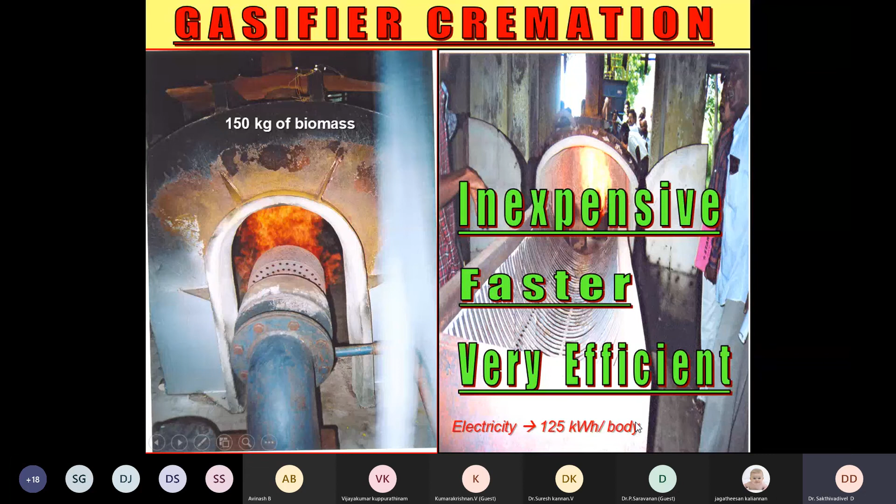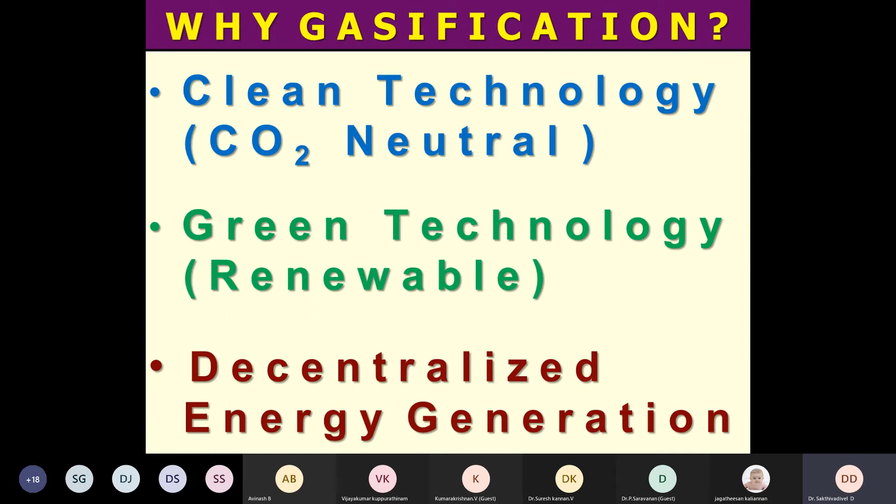Just imagine and compare the cost of burning a body. So what is the need, or why do you want this gasification technology? It's a clean technology. In the carbon dioxide cycle, it is carbon dioxide neutral—even negative carbon dioxide, as we are completely mitigating carbon dioxide emissions. It's a renewable fuel, a green technology, and wherever decentralized power generation is to be adopted, you can preferably go for this gasification-based electricity generation.

Going forward, schools and college laboratories should have gasifier-based experimentation for demonstrating to the future pillars of our country. Financial support, research funding, and subsidies should be given to investors in these gasifiers. Microfinancing and repayment opportunities should also be given to people interested in installing this gasification-based technology.

Some research and development projects should be sanctioned in this field for promoting these gasifier-based technologies for the green future of our country.

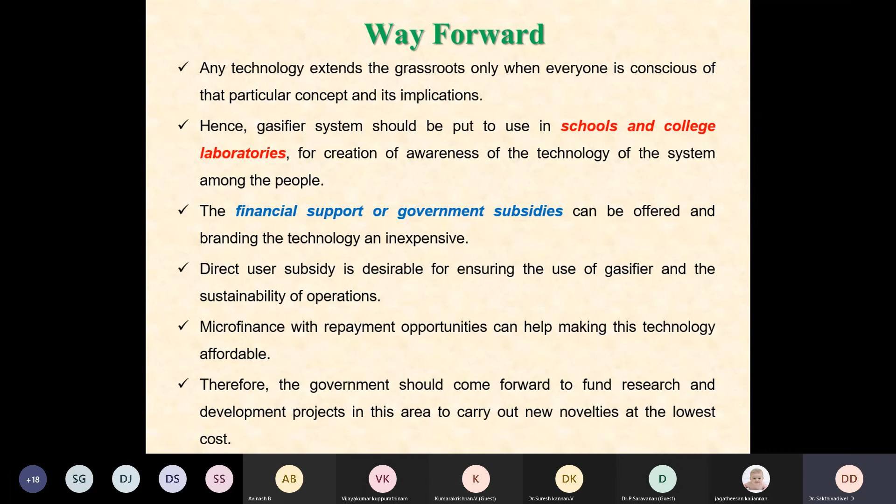The Government of India promised in the Paris Accord that by the year 2030, 40% of energy would preferably come from renewable energy resources. Likewise, our former President of India, Dr. APJ Abdul Kalam, delivered a speech on Independence Day in 2005 stating that by the year 2030, our country should achieve energy independence through solar energy and other forms of renewable energy. One form is gasifier-based biomass supplied gasifier technology.